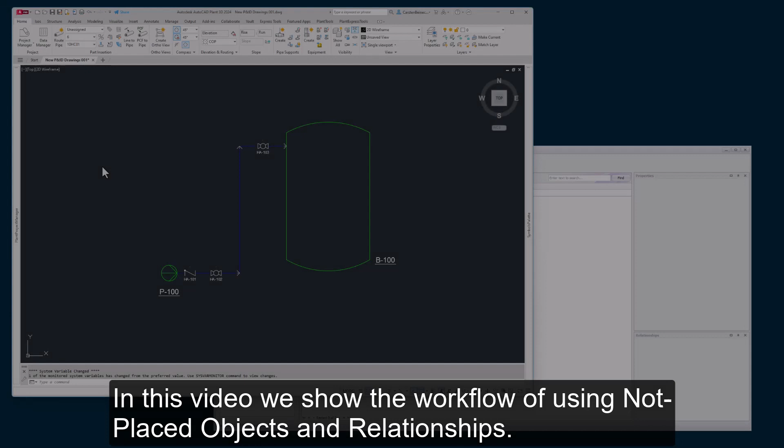In this video we show the workflow of using not placed objects and relationships. We start with this sample drawing where we want to add a gear, motor and an instrument to the pump. We close the project for now and open the project in PlantDataManager. The features shown in this video work for collaboration projects as well.

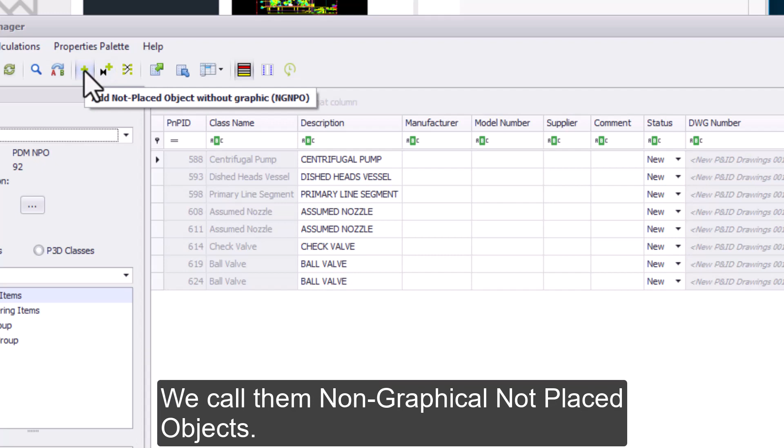What are not placed objects anyway? Not placed objects are objects which exist only in the Plant 3D project database where they will stay. We call them non-graphical not placed objects. But you can also insert them into drawings. We call them graphical not placed objects, because their purpose is to be inserted into the drawings at some point.

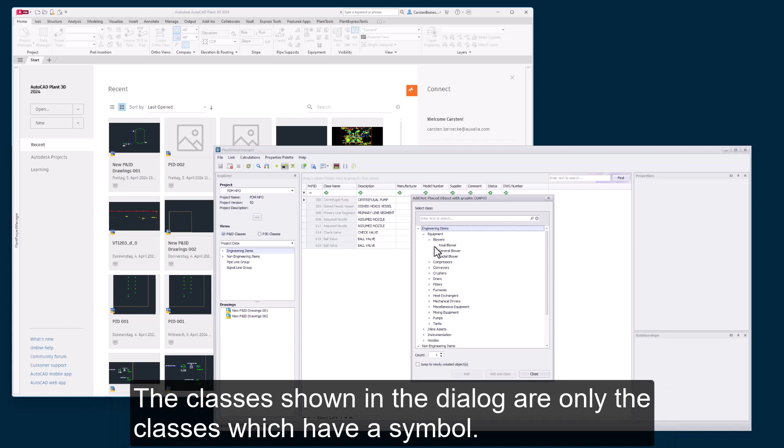When inserting a graphical not placed object, a dialog opens where you can select the class of the symbol you want to add. The classes shown in the dialog are only the classes which have a symbol. Instead of going through the class structure, you can filter the classes. Now we select the electric motor and click on Add and Close. You can also use a double click or the Add button to add not placed objects without closing the dialog.

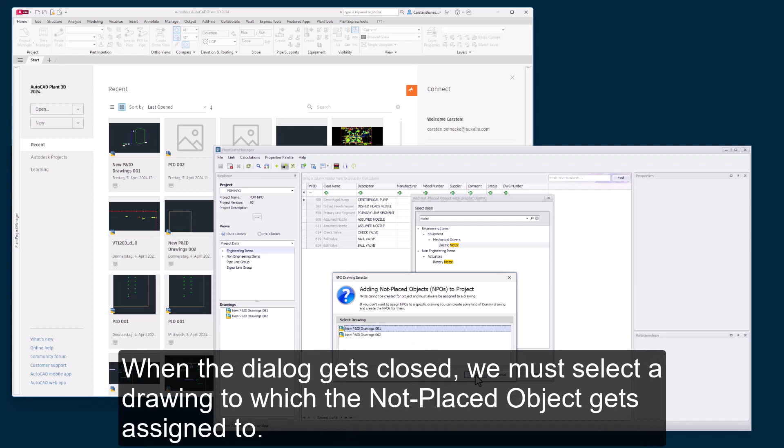When the dialog gets closed, we must select a drawing to which the not placed object gets assigned. We now see the motor in a light green color. In the Properties palette we added the tag.

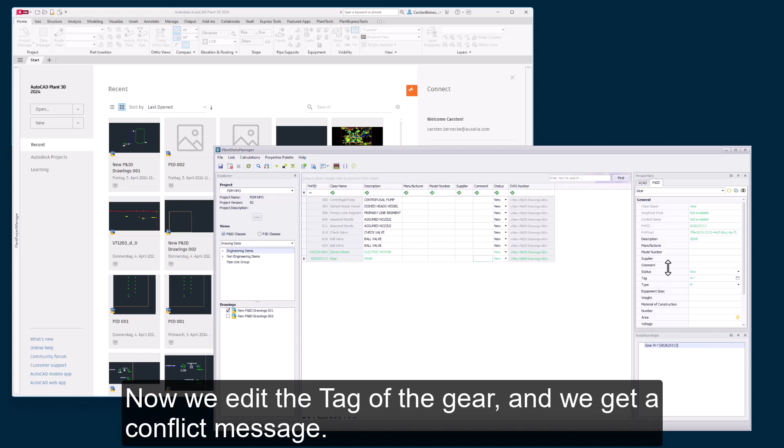If we switch to Drawing Data View and select one single drawing and now add a gear, there will be no dialog asking us which drawing the not placed object should be assigned to, because this is clear since we selected just one drawing. Now we edit the tag of the gear and we get a conflict message. PlantDataManager not only checks a given tag against the tags used in the drawings, but also against other not placed objects. Of course, not placed objects can be deleted if needed.

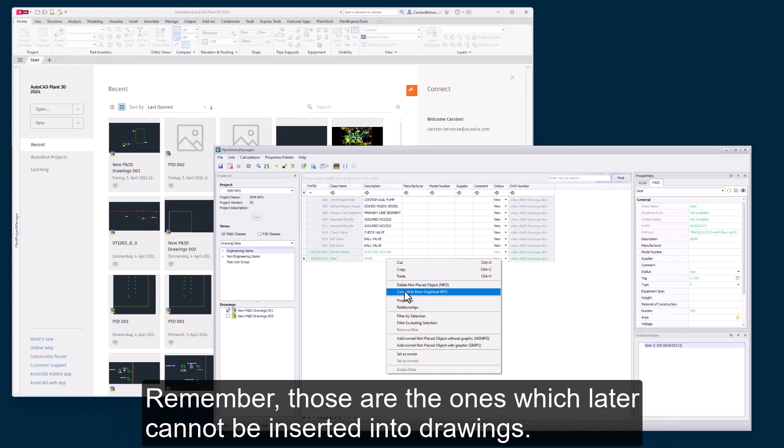You can also change a graphical not placed object into a non-graphical not placed object. Remember, those are the ones which later cannot be inserted into drawings. The non-graphical not placed objects appear in light blue. And we convert it back because we want to insert the gear later into the drawing.

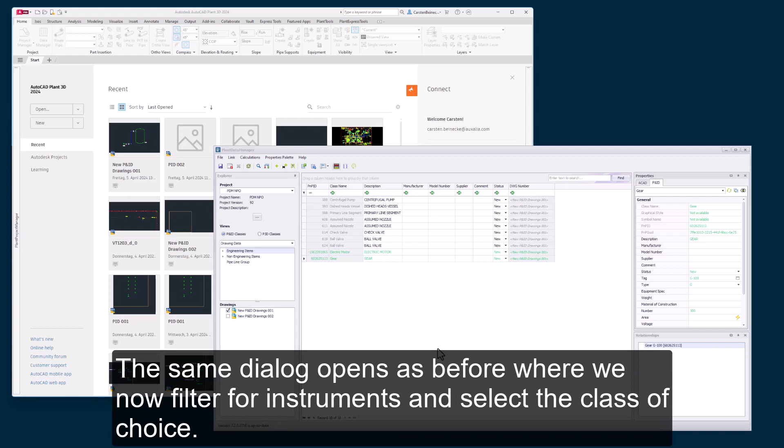When you create not placed objects, you can create them already with a relationship to an owner. For that we use add owned not placed object with graphics. The same dialog opens as before, where we now filter for instruments and select the class of choice. There will be no dialog asking us about the drawing, because the new not placed object uses the same drawing as the owner, in this case the gear.

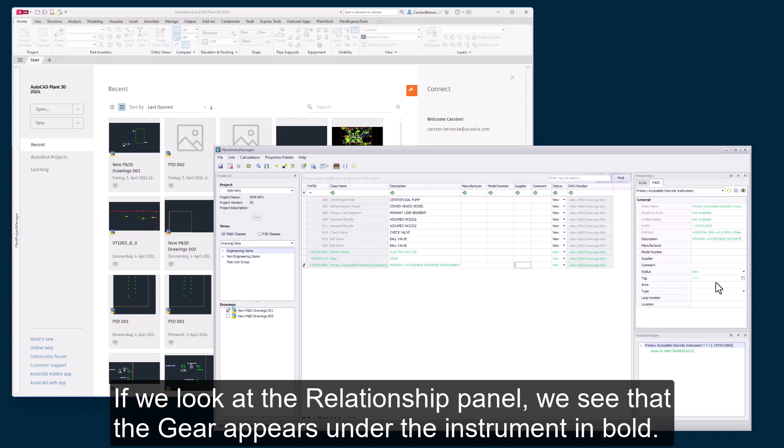In the relationship panel we now see the instrument under the gear. We added the tag for the instrument as well. If we look at the relationship panel, we see that the gear appears under the instrument in bold. This means that the gear is the owner of the instrument.

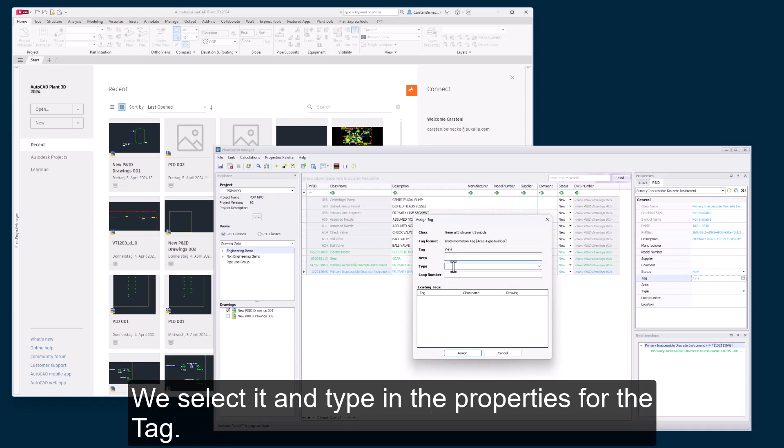Next we create a non-graphical not placed object for the instrument. Again we filter for instruments. The new instrument appears in light blue because it is a non-graphical not placed object. We can select it and type in the properties for the tag. If we select the gear, we can now see the two instruments under each other with their relationships.

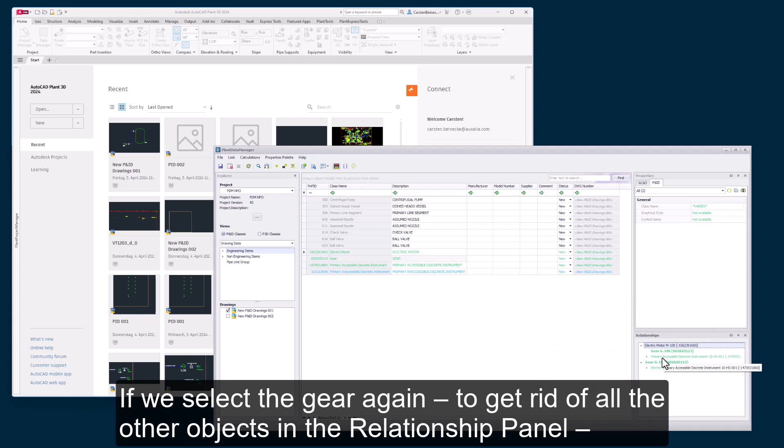With the control key we select the motor as well. We can now move the instrument to the motor, and then the motor with its two instruments to the gear. If we select the gear again, to get rid of all the other objects in the relationship panel, we can expand the tree to show the relationship between the objects. If we now also select the pump, we can move the gear to the pump. Selecting the pump alone, we see everything under the pump.

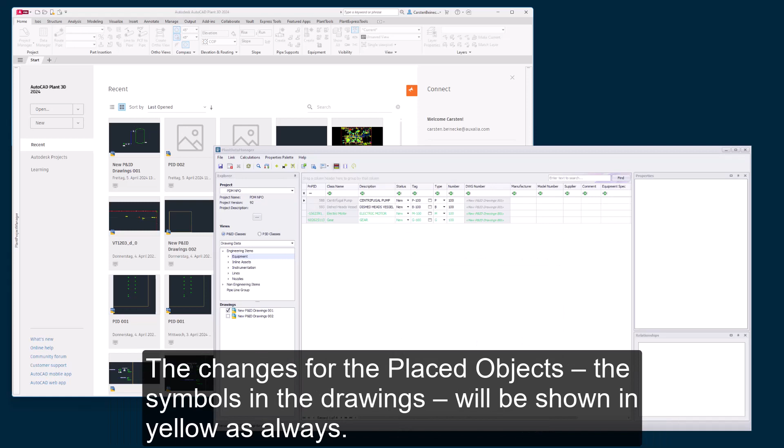Not placed objects will also be exported, where we can then edit the data and import the changes back into PlantDataManager. The changes for the placed objects, the symbols in the drawings, will be shown in yellow as always. The imported changes for not placed objects are not shown with a background color, because the changes have an immediate effect on the objects, since the objects don't need to be updated in the drawings. Now we are closing the project and mark the changes as ready for import.

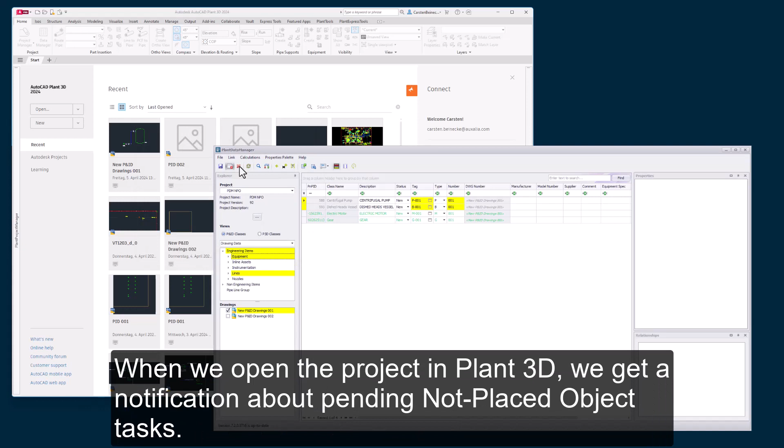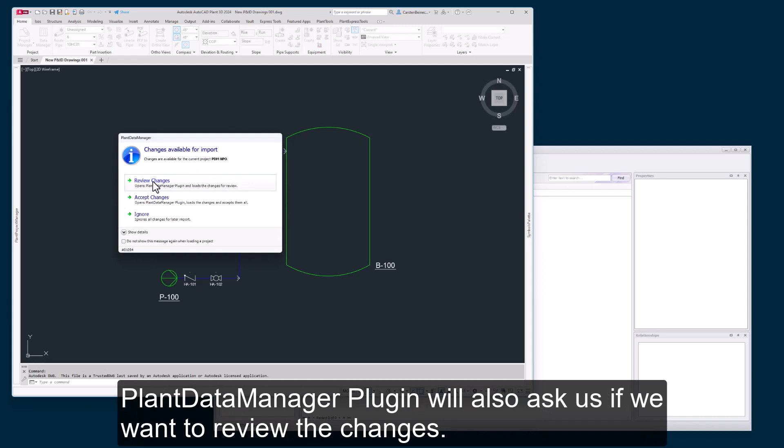When we open the project in Plant 3D, we get a notification about pending not placed object tasks. You can execute the tasks when opening the project or when opening a drawing. In this case, the PlantDataManager plugin will open the drawings for which not placed objects or relationships were defined. Since we made changes to the tags of the equipment symbol in the drawing, PlantDataManager plugin will also ask us if we want to review these changes. We can now review these changes as always and accept those changes.

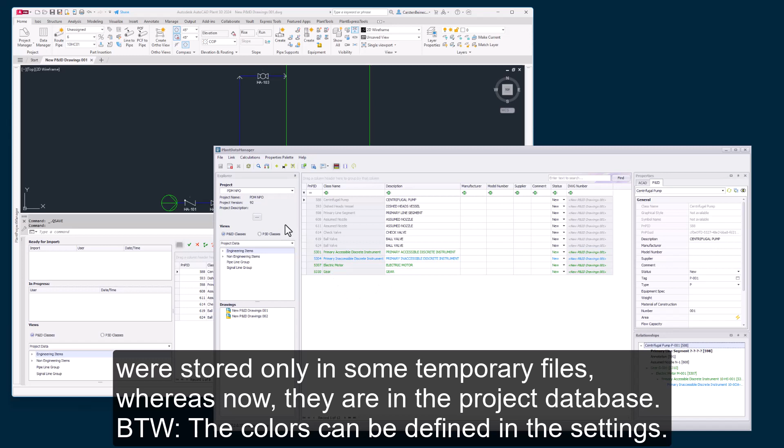Let's open the project again in PlantDataManager to see what happened. The light green and light blue colors change to darker colors. The reason for this is that the previously created not placed objects were stored only in some temporary files, whereas now they are in the project database. By the way, the colors can be defined in the settings. Selecting the pump again still shows us the relationships as before, now just with the darker colors. We close the project again and go back to Plant 3D.

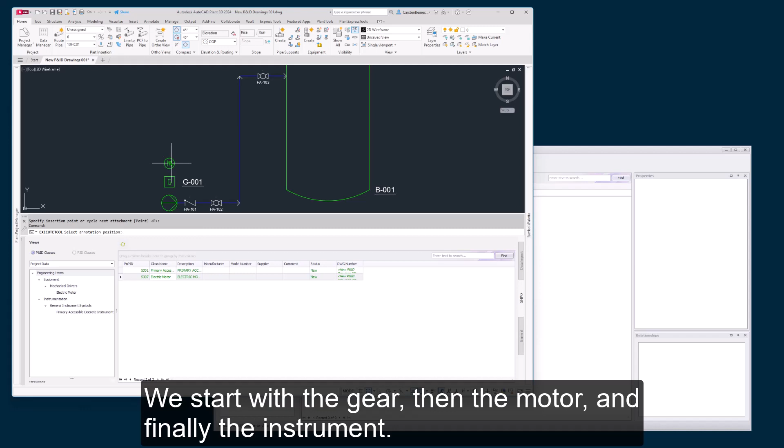In PlantDataManager plugin, we switch to the GNPO tab, which stands for Graphical Not Placed Objects. Right-clicking on the not placed objects allows you to finally insert them into your drawing. We start with the gear, then the motor, and finally the instrument. While inserting the not placed objects, the list gets shorter and shorter until the list is empty. The second instrument does not appear because it was defined as a non-graphical not placed object. To complete the drawing, we add some leader lines between the symbols.

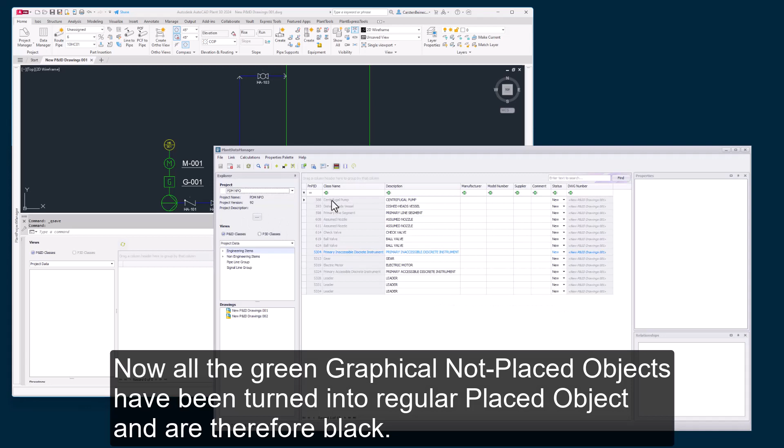After saving the drawing, we go back to PlantDataManager one final time. Now all the green graphical not placed objects have been turned into regular placed objects and are therefore black. Only the non-graphical not placed objects remain. The relationships from the beginning are still there. Not placed objects can be used in reports when using Plant Reporter as well. You can see and edit them also through Plant 3D's Data Manager.